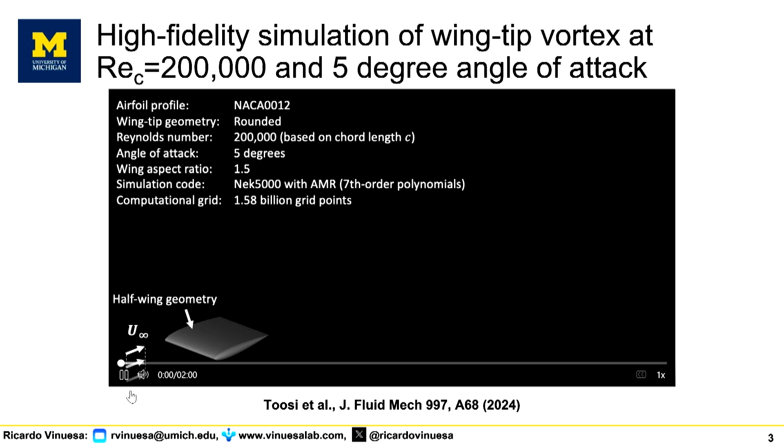When I talk about control, I'm looking at this type of complex flows. Let me show you a little video. So we have been doing a lot of computational work before the ML work on computational fluid dynamics. So what you can see here is a turbulent wing, so the wing of an airplane, where we cut and have a rounded wing tip over here. And what I'm showing you are vortices, vortical motions, swirls present in the flow. And I'm going to be telling you a bit more about it later.

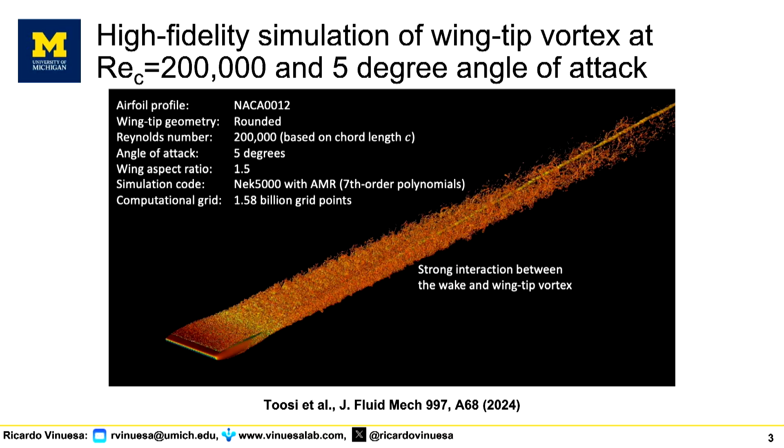This is the highest resolution simulation that you can have. We're solving all the scales. We have a Reynolds number of 200,000, which is kind of similar to what you can do in a wind tunnel. And we really have a high level of detail, as you can see. You can see how next to the wing tip, the pressure difference, so basically there's higher pressure on the lower side of the wing, creates this vortex, this motion that rolls around the wing and is impacting the aerodynamics that happens in the wake. So that's after the wing.

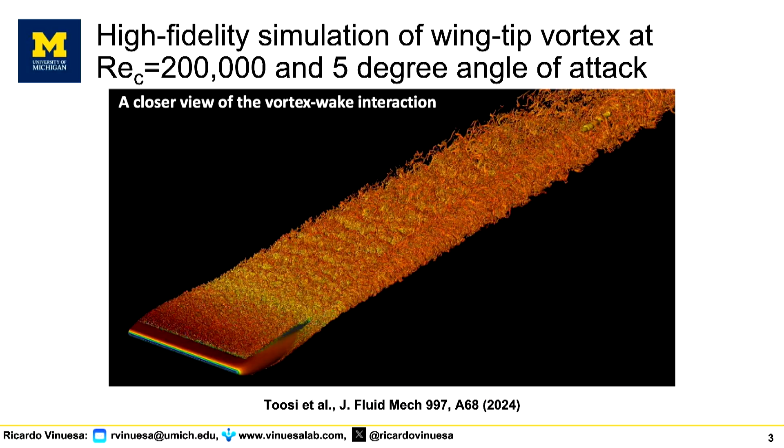So essentially, this rotational motion here, what it's doing is making it more difficult for the wing to extract lift from the air around it. You need to increase the angle of attack to get the same lift, and that adds an additional component, which would be the lift-induced component of the drag.

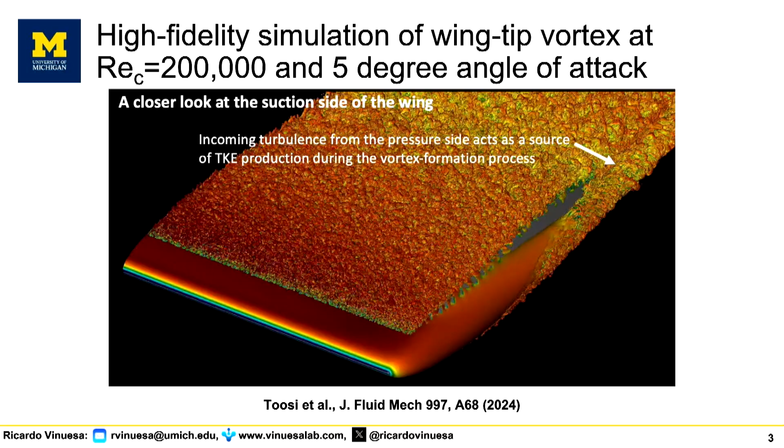So basically, this very chaotic motion over here, this is what we call turbulence. And this chaotic motion, this very multi-scale and intricate motion, this is what we are trying to answer and try to really get into some of the details in order to reduce drag, in order to enhance mixing, and improve a wide range of applications that we have around us.

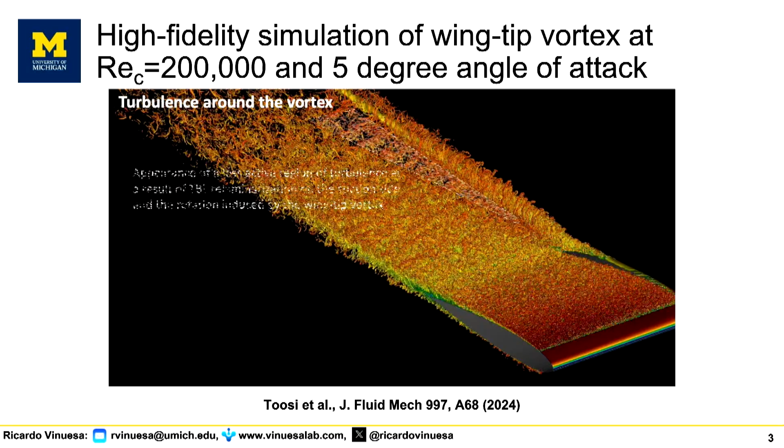And by the way, remember that I'm showing you vortices. Every time that someone does a very nice simulation on hundreds of thousands of processors, they're showing you typically vortices. And at the end, this is something that you can see when you do a wind tunnel experiment, but nobody tells you that this is important in your flow. This is something that you can see. Keep this idea in mind, because we'll get back to it later in the presentation. So for now, just keep how complex these flows are and how chaotic all the motions look like.

So if I want to control, and by control what I mean is to, for example, reduce the drag, so the friction of the air around the airplane, I may do that in different ways. Let's imagine that I have this instantaneous 3D object, and this could be these vortices that I showed you before. One possibility to control the flow could be to first identify what are the most important regions.

So out of those 3D objects, which ones really matter and which ones do not matter. So first identify the most important regions in the flow. And second, once we identify the important regions, just eliminate in a very surgical way those important features and nothing else, so that I can have a very targeted, a very efficient control, just focusing on the most important regions of the flow.

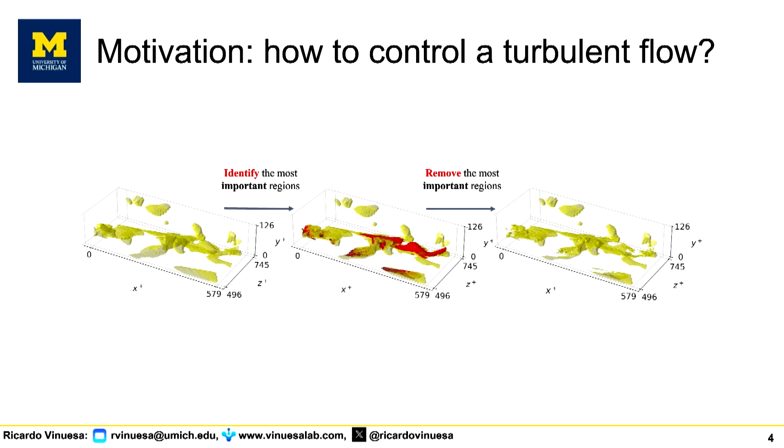Okay? So that's going to be the guiding principle for the rest of the presentation. I'm first going to identify the most important of those 3D objects, and second, we're going to try to control those. And to identify the most important, we're going to be using explainable deep learning. So we're going to try to use some ideas of really assessing causal mechanisms present in our complex turbulent flow.

And this question, what are the most important features of the flow, this has been asked in the past. For example, Encinar and Jimenez, they tried to look at this question by doing interventional causality analysis. So basically, they would simulate the flow, introduce a perturbation, resimulate it, and then see which of those perturbations were growing the most. And of course, they got some interesting conclusions, but this is interventional, meaning that you're basically changing your flow. And this is very computationally expensive because you need to rerun many simulations.

The approach that we take is kind of in the middle. We want to do an interventional method, but on a surrogate model, meaning that we are not going to resimulate the flow. Since we do it on a surrogate model, we're going to stick to the original trajectory. We're not going to go to different trajectories, but we're going to try to remove elements to see how that affects the predictions in our system.

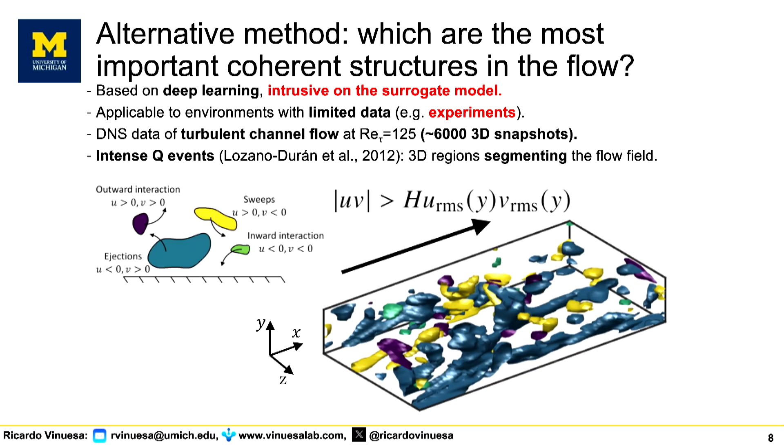So we start with this example here. This is the flow between two walls, basically. This is a turbulent flow in a turbulent channel. We're going to identify 3D objects like this one, which satisfy this condition. This condition means that you have what is called an intense Reynolds shear stress. So basically, you have regions of strong fluctuations in the direction of the flow and in the vertical direction.

And those regions, I can tell you that this is something that traditionally people have been thinking that is important, and now we're going to try to really assess if this is important or not using explainability. So once again, and this is kind of like the theme of this first part, the classical intuition is not always right, especially in this very complex multi-scale phenomena.

So let's look a little bit at the method, and this is something that we published with Andrés Cremades last year in Nature Communications. We basically have 3 steps. So we are going to try to use Shapley additive explanations, SHAP analysis, to, given the present state of the flow, which consists of three-dimensional fields, the U, V and W fluctuations, predict the future state of the flow, so the U, V and W fluctuations in the future, and then we're going to identify these volumes of Reynolds stress, of U and V fluctuation, and we're going to remove them.

Right? So we're going to do the SHAP analysis, so we will remove this big volume, repeat the prediction. If the error of the prediction increases a lot, that means that this volume here was very important. If the error doesn't change very much, that means that this was not very important, in a nutshell. Okay? So working like that, we first need a prediction method to go from the present state to the future state.

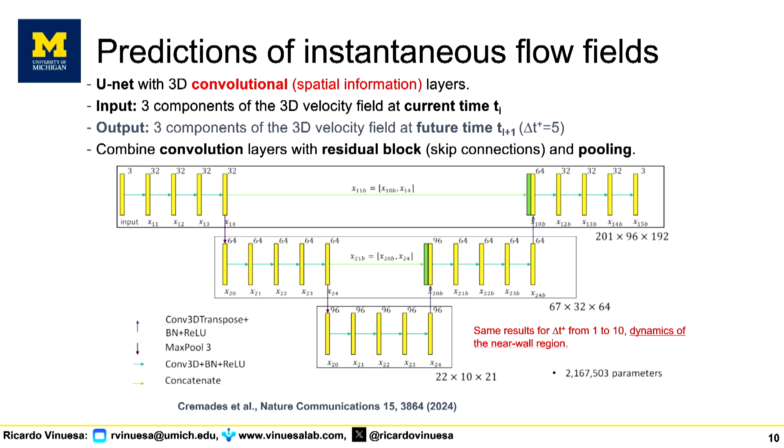So this U-Net, again, is just a computational tool to then use explainability on top of it; diffusion, flow matching, other methods that we've been trying would give us another means of performing that prediction. So we have this computational framework, and this is how the algorithm would go. So I would have the present state of the flow, which are the fluctuations now. These are three-dimensional fields of U, V, and W. U means streamwise fluctuation, flow going like this, V flow going up, W flow going sideways. So we have three velocity components now.

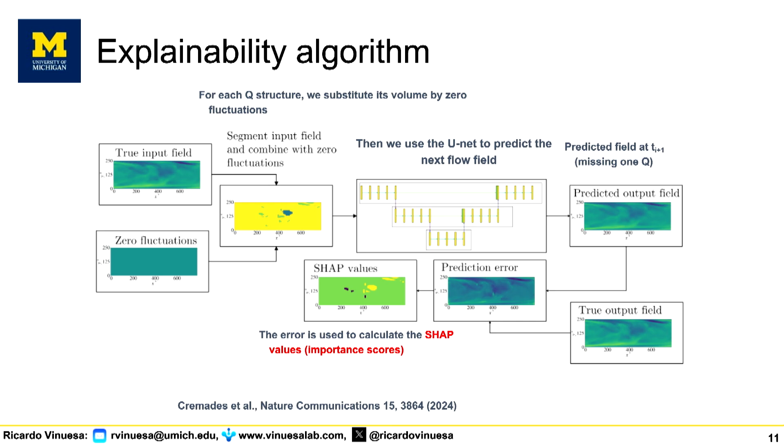I will predict with the U-Net a future state of the flow, again, with a time delay associated with the temporal dynamics that I want to resolve. And then I will compare the prediction with the ground truth. And the ground truth comes from very, very highly resolved numerical data. So this highly resolved numerical data is used both to train our models, but also to validate these predictions. That's where we get less than 0.5% error, with maximum errors below 1%, by the way. So in regions of high fluctuation, we also get very high performance. And that's the prediction error that we have.

Then we go back to here, to the input data. We segment the flow with those 3D volumes. Now we remove one of those volumes. I repeat my prediction, and I recalculate the error. And if the error increases a lot, that means that that volume was important, and vice versa. So essentially, for each of those 3D volumes, I get a SHAP value or importance score that basically tells me what is the capability of prediction of future states of the flow of that region, of that volume that I have there.

And I'm sure many of you are familiar with SHAP, but just a quick recap. This is basically a linear model of the error between the neural network and the ground truth. So this is a superposition of features. Q1, Q2, Qn, these are binary variables that indicate whether the structure is present or absent in my flow when I perform my prediction. And phi1, phi2, phi-n, these are weighting factors that represent how much that structure contributes to the error. These are basically the SHAP values. So these are the importance scores.

So in the end, the problem reduces to just solving this least squares regression, where I want to minimize the error between the linear model and the actual prediction. Right? So my neural network will have an error with respect to the ground truth. I want the linear model of that error to be as small as possible, basically. And this pi x, this is a kernel based on game theory, which creates coalitions. I'll tell you more about those coalitions in just a second.

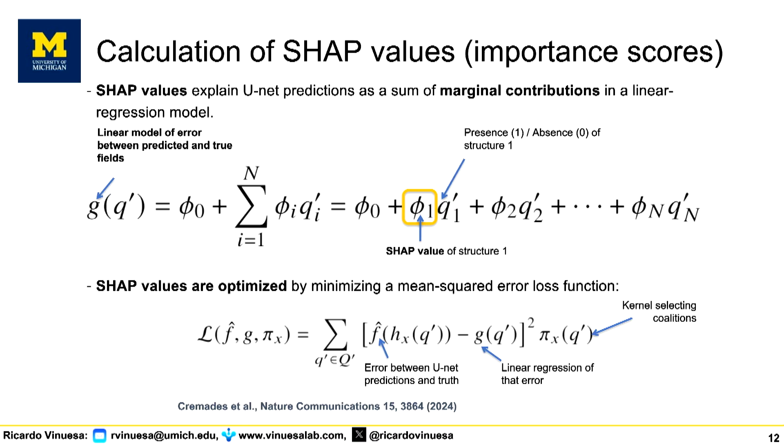So each feature is removed in a context, together with other structures around it, sometimes close to the wall, sometimes farther away from the wall. And the net contribution of each feature to the error is assessed in many of those contexts. So this emulates the interscale interactions that you have in turbulence, because each structure is contributing with many others, and that basically reproduces quite well the dynamics of our problem.

So we have tested this for many different numbers of coalitions, structures per coalition. The results are robust and converged. So we're pretty confident that this approach with the kernel of coalitions is giving us a good representation of the causal mechanisms in our problem. So having looked at this, what we know is that we have a method to assess importance of each of the 3D volumes that we have in our system, basically.

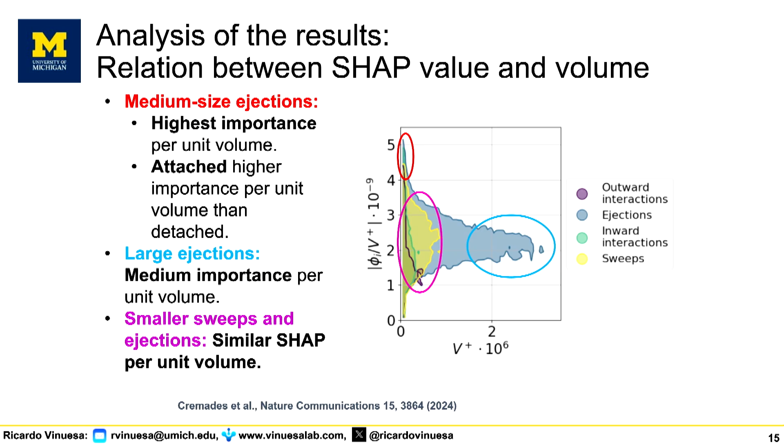When I scale the importance per unit volume as a function of the volume, then things change. When I have kind of like a specific importance, the largest objects over here are not the most important anymore. The most important are these ones over here, which are medium-sized ejections. So smaller objects that, again, go away from the wall. And that starts to be a little bit against the classical intuition. We are starting to see things that are a bit different from the classical understanding of these types of problems.

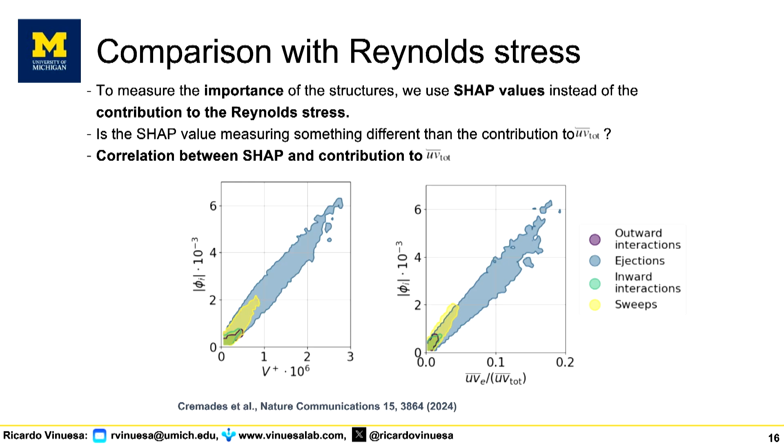But if I scale the importance per unit volume and I represent that as a function of the Reynolds shear stress per unit volume, again, the quantity that people have been looking at, what I see is a lack of correlation. Now I see 3 different areas. In this first area, you can see a pretty broad spread of importance values, so the correlation is gone. In region B over here, you can see the structures with the highest Reynolds shear stress, and up here, the structures with the highest importance, and they're not the same.

So now we start to see that the classical understanding of what's important and what is not is not necessarily true. Here are the things with highest importance. They're not the ones with the highest Reynolds shear stress. This is one first result that is interesting in the context of how we can interrogate the data to tell us what matters and what doesn't matter, and not necessarily rely on the classical intuition.

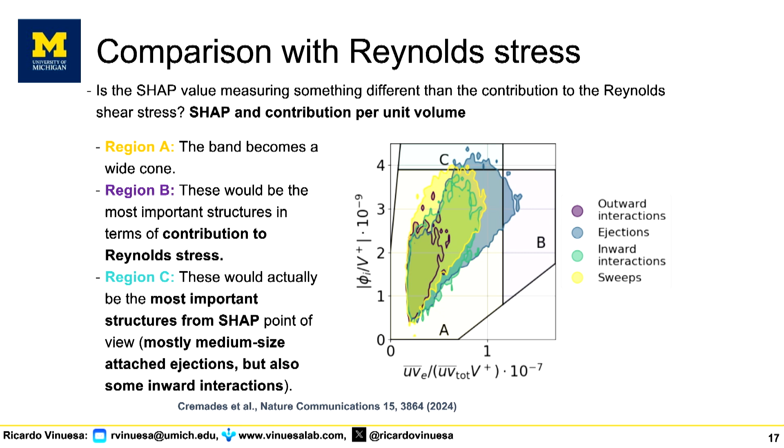Of course, one advantage of this method is that it can be applied also to experimental data. And this is a towing-tank experiment by my friends at the University of Melbourne. This is Ivan Marusic's group. The reason why I want to do this experimentally and not only numerically is twofold. The first one is an experiment can be done in more extreme conditions than a simulation. So if I identify what's important in a very small simulation, that might not be the same as in a very large experiment, first of all.

And second, and more crucially, even if I could do a simulation at the same conditions as those in an experiment, the simulation will have much higher resolution than the experiment. When you're measuring, you have noisy data, low resolution, inaccessibility to certain areas. So the very nice 3D volumes that I showed you, you will not be able to find them in a wind tunnel experiment, just because of the lack of resolution and quality of measurements.

So the question is not, what are the most important structures in the flow? The question is, from whatever I can measure, which may be limited, what is the most important? And that's why I want to apply this framework directly to experimental data sets. And the framework there in Melbourne was very similar to that of the simulations.

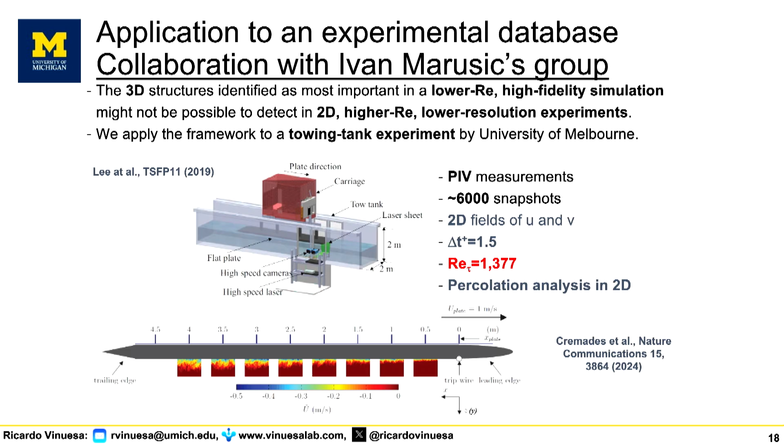The Reynolds number, which tells me how chaotic my flow is, so how challenging the situation is, is an order of magnitude larger. So that's a more challenging case. But in terms of time resolution, it's very similar. The main difference is that experimental data is two-dimensional. So you cannot look at 3D volumes. You can only look at 2D planes, basically. And you will have lower resolution than in the simulation.

And if I look again at the Reynolds shear stress, I find something quite consistent. What I find is a very good correlation between the importance and the Reynolds shear stress. And if I scale the importance per unit surface as a function of the Reynolds shear stress per unit surface, the same three areas that I found before are also present. Region A, where the correlation is gone. Region B, where the Reynolds shear stress is dominant. And region C, the structures with the highest importance.

And now, experimentally, we get the same as with the simulation. We corroborate that the classical intuition might not be the best, because the most important structures, which are up here, are not the ones with the highest Reynolds shear stress, which is the quantity that people have been looking at. So here's where we start to get some intuition.

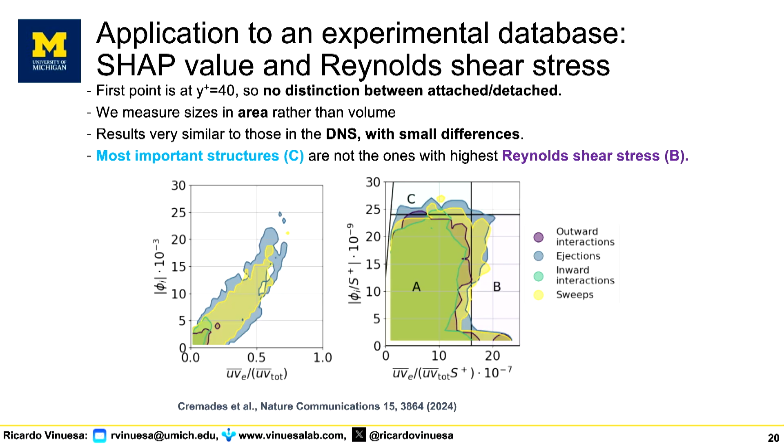But of course, everything that I've been telling you so far was with an initial assumption. I was pre-selecting those 3D volumes, and I was telling you, OK, this is important, this is not. But I was pre-selecting those. Ideally, what you would want to do is calculate the importance of each point, and then cluster the regions of highest importance. And that's something that we did for the experimental data. Let's see if this works now.

Yeah. Using gradient SHAP, which is a variant of the Shapley framework. This is much more computationally efficient, and it essentially allows me to formulate the problem similarly. So my input will be the fields of velocity now. My output will be the fields of velocity in the future. And now the difference is that I'm going to be removing the points one by one. So I take this point over here, I remove it. If the error increases a lot, that means that this point is very important. If the error doesn't change very much, that means that that point was not very important.

So gradient SHAP conceptually is similar to kernel SHAP, which we used before. The computation is much more efficient, and it allows us to calculate the importance point by point. So now, it's a complete change of paradigm. I'm not going to pre-select any volumes. I'm just going to look for experimental data at the importance of each point of the domain. And remember, the experiment is 2D, so this is a 2D slice.

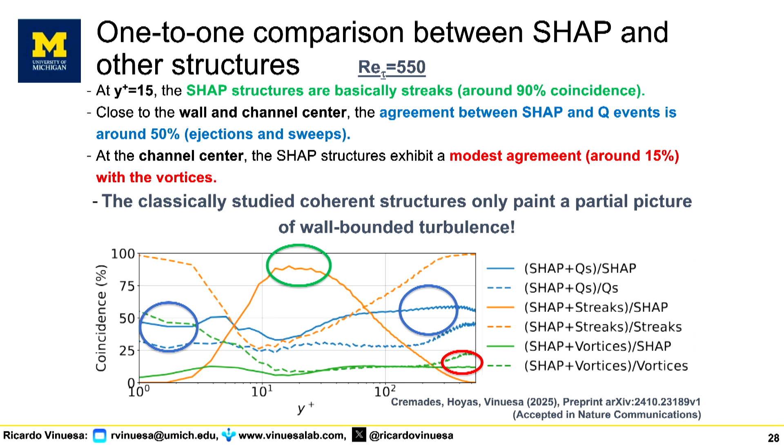So I promised you that there was going to be flow control, or I promised the people who gave me money. So let's talk about that. I want to reduce the drag. So the idea is, now that I identify what are the most important features in my 3D flow, I want to try to find ways to remove those features that are important.

And to do that, of course, this is a very well-versed audience in ML. I have a high-dimensional problem that is chaotic and is changing dynamically. So obviously, reinforcement learning is a natural choice to try, at least. And we were the first ones to try reinforcement learning to control turbulence some years ago. This is when it got published, not the year we started doing this.

And I don't have to explain reinforcement learning to this audience, but I can just say that the agent, which is the neural network that we're going to try to train, is interacting with an environment, which in our case is going to be either a simulation of the flow or an experiment of the flow. And the key is that the agent is going to try different control strategies, which in our case is going to be through jets on the surface of the wing.

And this is the first application of reinforcement learning. This is Luca Guastoni, a great former student of mine, who did that. And we have also a review paper on how reinforcement learning is used for flow control, which may be of interest to some people in the community and in this audience.

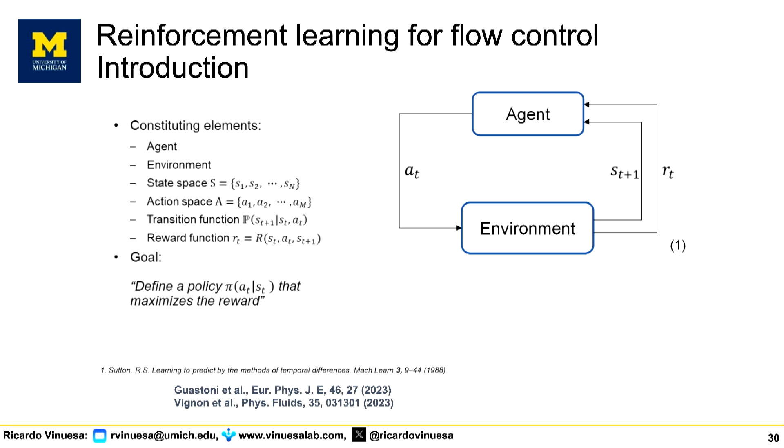So the idea is that we wanted to try reinforcement learning to control turbulence and compare with a classical benchmark. We were trying on this channel flow. So basically, this is a flat plate, and we're going to try to do blowing and suction there. We consider two cases, one in a small domain, so the computational box is smaller, that will make the physics simpler, and for training the reinforcement learning agent it is going to be easier.

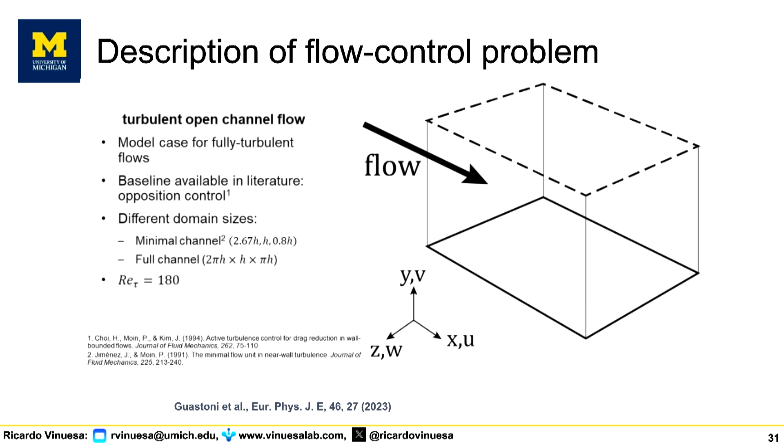And then we're going to do transfer learning to a larger domain where the physics is more complicated, basically. And the classical benchmark is what is called opposition control. So in opposition control, what we do is that we have the wall here. We're going to sense the flow above the wall at a region where the fluctuations are very strong, and we're going to be looking at the vertical fluctuations.

So if the flow is going up, we're going to put a velocity that is negative at the wall, so we're going to do suction. If the flow is going down, then we're going to blow. So that's why it's called opposition. This is a linear proportional controller, basically. And this, despite being very simple, this is 30 years old, by the way, gave quite some reasonable performance in many cases, and that's why it's a good benchmark for us.

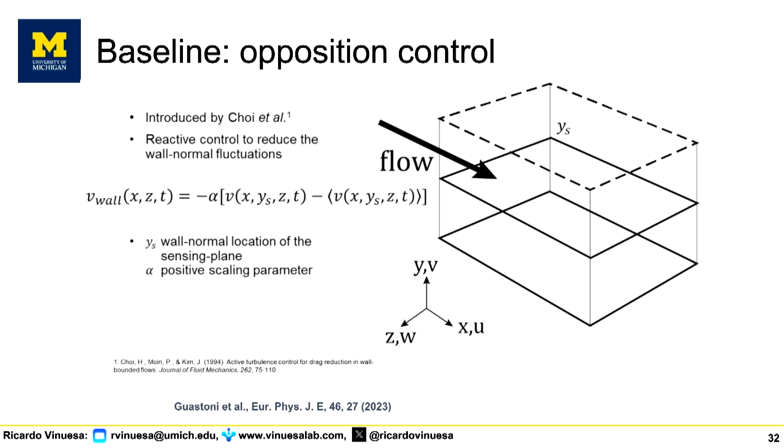And our expectation or our hope is that with reinforcement learning, we will come up with a policy that is something a bit more sophisticated than just opposing the fluctuations, something a bit more complex. And well, that's what we want to do. I want to also illustrate this with multi-agent reinforcement learning. I know that this has different names in the ML community, depending on who you talk to. But I will just say what I mean with multi-agent reinforcement learning.

Essentially, we have our domain where I have an invariance in both the streamwise and spanwise directions. The flow is homogeneous. And of course, the flow is turbulent and chaotic, but statistically, in all those directions, it's doing the same. And I have all these pseudo-environments, which are copies of the same agent, where what I managed to do is to train in parallel, because each of those pseudo-environments is seeing a different instantaneous realization of the same physics. Statistically, it's the same physics, but they are different instantaneous fluctuations that all together would correspond to the same problem. So I can parallelize the training with these pseudo-environments.

And the other thing is that because the reward is global, the reward is the drag reduction, in this case the skin friction reduction, over the whole wall, all those agents, all those pseudo-environments start to cooperate to achieve the maximum drag reduction, basically. So we did a lot of experiments with single agent, meaning that each of these pseudo-environments has its own parameters, then each of them egoistically would try to maximize their local region and not achieve very good performance. But with a multi-agent, by exploiting the invariances and by achieving cooperative learning, we got much better results in turbulent flows.

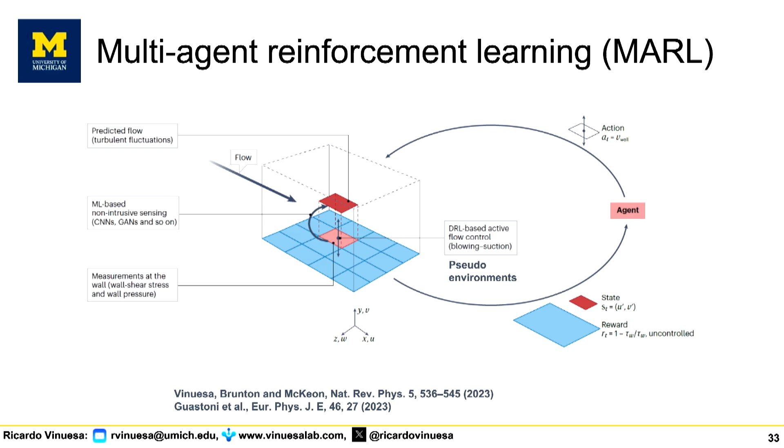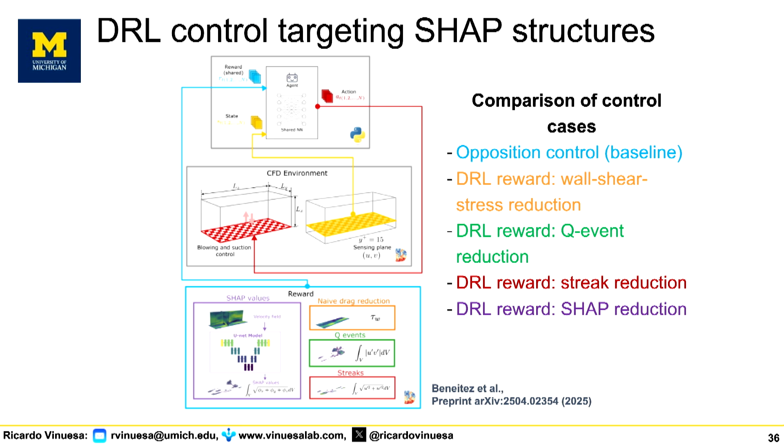More importantly, you get much lower fluctuations over here. You get a much more stable control because, once again, you're just surgically going after the most important features in your flow. This is very interesting from 2 points of view. The first one is we beat the reinforcement learning. So by informing the reward with physics of what's important in the flow, we get a higher drag reduction.

But also, we show that the other classical structures, the Reynolds stresses and the streaks, they give me less drag reduction, which means that they were less important for the turbulence than ours. So we're basically accomplishing two things here. We're confirming that our SHAP-based methodology identifies truly important features in the flow. And second, we're also showing that by informing the reward with physics, we get much better performance. So this is actually quite exciting when I saw that it was working.

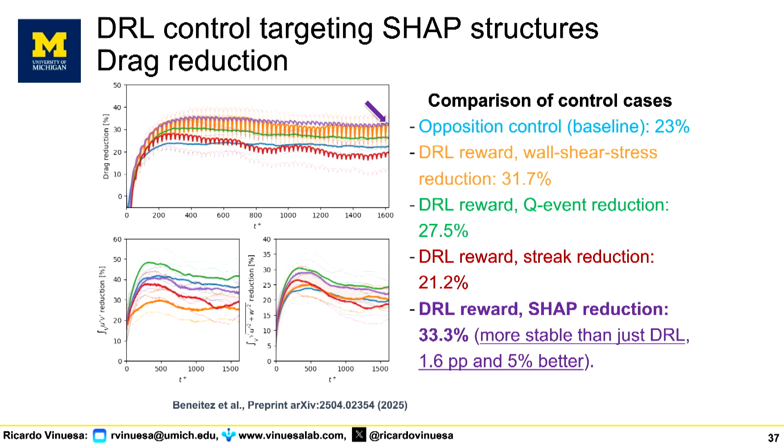The SHAP-based control, what it's doing is going after certain features in your flow in a much more selective way. So you get half of the cost of the control, and if you look at the net energy savings, this is a quantity that is important when you look at transportation systems, because not only do you want to reduce the drag, you also need to see the cost of your control.

If you reduce the drag a lot, but you spend a lot on your control, then you didn't do anything. So the net energy saving is a quantity that takes into account the drag reduction, but also the power that you put in to achieve that drag reduction. Then the difference between the SHAP-based control and the naive drag reduction gets even higher. We have 5.5% difference. And if we put this in an experiment where you have more actuators and much more blowing and suction, then this difference gets even higher.

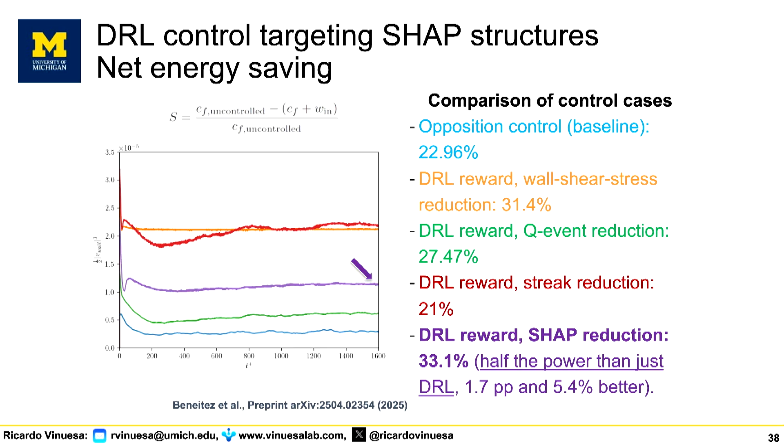So once again, this is quite promising in terms of being able to inform pretty good reinforcement learning strategies by identifying important features in your flow. Okay, so we're pretty excited about this. And to conclude, I want to show another cool example of how we can apply this to more complex geometries.

Third problem, simulating a wing computationally is much, much more expensive than simulating just a channel, because in the wing you have the curvature, you have the far field. It's a much more complicated geometry. And you know that reinforcement learning is very expensive because you need to train many episodes, many initial conditions, and stochasticity, so it's really very expensive.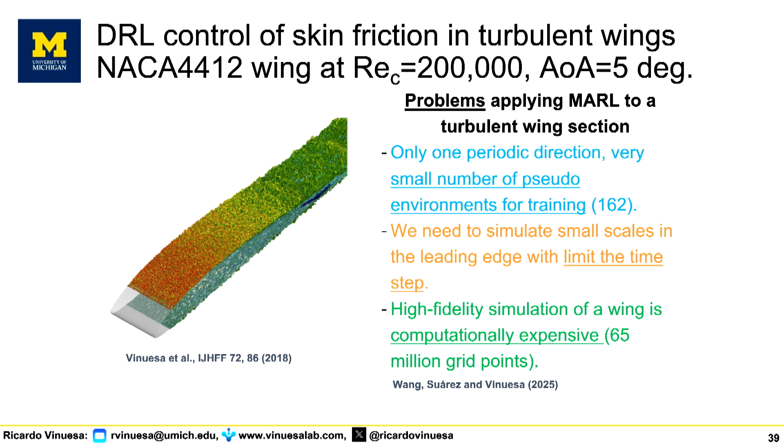So these optimistic ideas seem to be a little complicated, but then, together with my students, Yuning Wang and Pol Suárez, and Yuning Wang was crazy enough to follow me here from KTH, we came up with this idea. What if, instead of training on the wing, we would just take a block of the wing, like this section over here, take the conditions on that portion of the wing, and then take a channel, make the channel very big, so we have many agents, many pseudo environments to speed up the training.

I do all my training in a channel, mimicking the local conditions that you have in the wing, and once my training is done in a channel, then I do zero shot and I go back to the wing and deploy that directly on my wing section. Now this has several advantages. The first one is I increase the number of pseudo environments, because in the wing I only have one homogeneous direction, in the channel I have two, and I can make them as big as I want. So basically, I increase by a factor of 20 the speed up of the training, because I can train 20 times faster.

I only need to simulate a range of scales, not the whole range of scales, which means that I can have a time step 3 times larger, meaning that I make my simulation 3 times cheaper. And a channel, as I mentioned, is computationally much cheaper than a wing because you only need to resolve the region close to the wall. In the wing you need to resolve the far field and the pressure side and all of it. So basically, it's 176 times cheaper to simulate a channel than to simulate a wing.

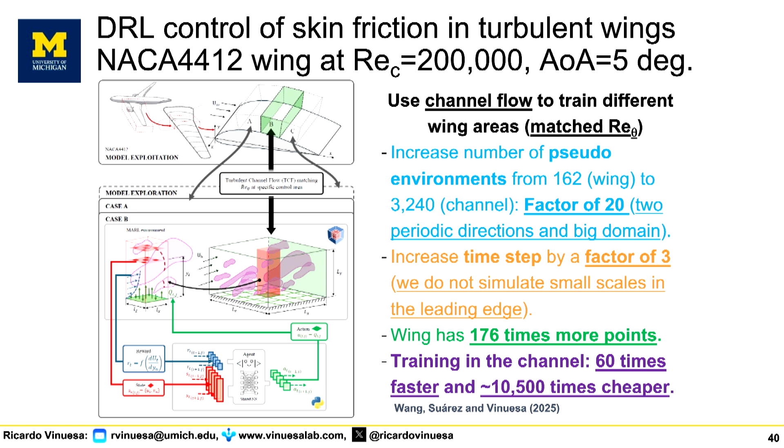So basically, by using these channels as a surrogate for the local physics of the wing, doing all my training in that channel and then doing zero shot back to the original wing, I train 60 times faster and 10,500 times cheaper than if I were to train the same reinforcement learning agent in the whole wing simulation.

And does it work? Spoiler alert, it does. These are ongoing results, so preliminary results basically. We took two regions of the wing: this is upstream, at the beginning of the wing, and this is at the end of the wing, just to try different parts. If I train the reinforcement learning in my channel and then do zero-shot deployment of the same policy in the wing, I get about 25 to 30% drag reduction.

And the classical method, which is the linear proportional controller, gives about 20% drag reduction. So you can see that we still perform way better than the classical approach by using this domain transfer strategy, basically taking advantage of all the pseudo environments that you can have in the channel geometry. So this is something that we believe is pretty cool, and we're developing much more to be able to deploy

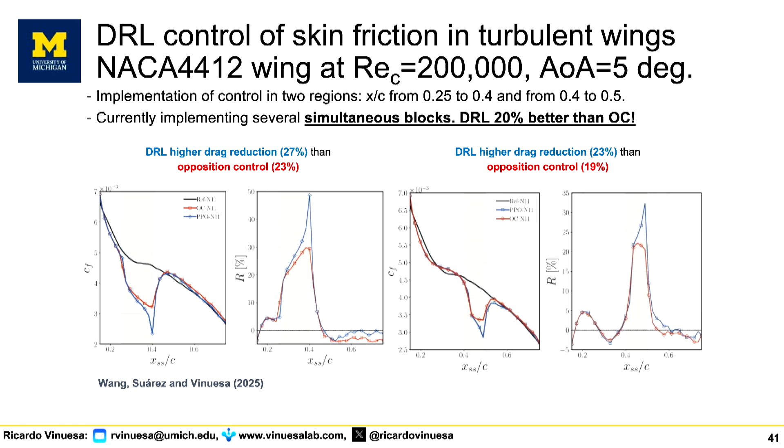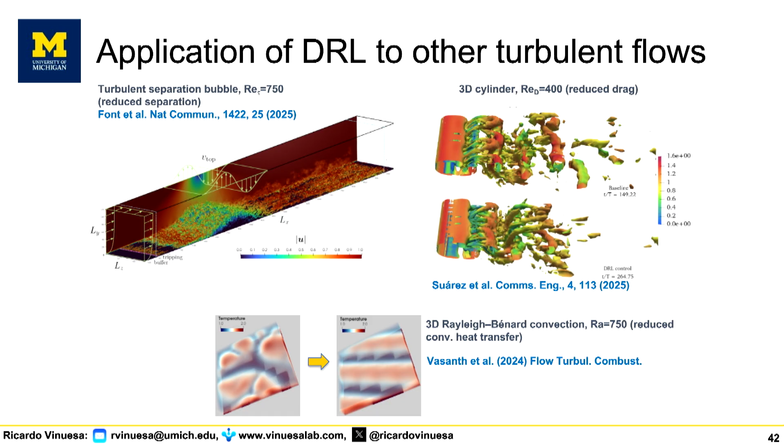And the most exciting part is that by combining the interpretability, the important structures that we find in the flow, with the reinforcement learning, by informing the reward with those important features, we get the best performance in terms of drag reduction.